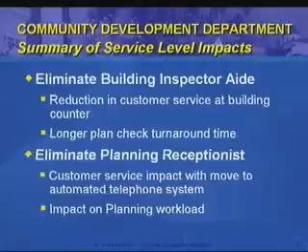Eliminating our planning receptionist, we're going to be going to an automated phone system, and we're expecting mixed responses from that. It'll be a change and people may not like it at first, but we're also promoting direct access to our individual extensions. We're trying to do the best we can with that change.

With the elimination of the planning receptionist, this represents two positions down in our admin support group, one from last year and one here. So spreading the work from that person to the remaining admin staff is an impact. We're already working on it. We know it requires fewer people doing more things, and doing them differently.

Ms. Lodge. A question about the elimination of the receptionist. When people come upstairs, members of the public, what will happen? Thank you.

Yes, we will continue to have reception services. We are actually working with the redevelopment agency staff, and there will be a general fund payment to support redevelopment staff to provide our reception services. So when you come up the stairs or out of the elevator, there'll be two people sitting at the front desks where we have desks today, greeting people.

They'll also arrange for people to wait and get into meeting rooms, and handle all the normal reception duties, as well as answering our phones. So if the phone tree leads you to a dead end or you want an operator, you'll press zero and you'll have reception staff. Yes, absolutely, it's just that we don't have the position, we're going about it in a different way now.

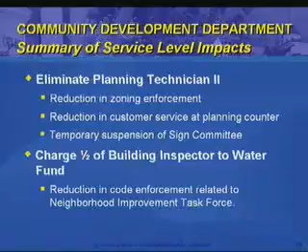The building inspector position is a continued effort, and again, losing half a person does affect some of their other enforcement work.

Cumulatively, we say this all the time, and the list gets longer. Sometimes we're able to work on the list of special projects, but we really think our ability to implement priority projects with Plan Santa Barbara, keep all the planning functions going, and handle our special to-do list is going to be impacted, really, to a large degree.

That includes things presently like we had all wanted to create a new setback in commercial zones. The council wants us to re-examine the hedge ordinance. There's a new city program to collect transient occupancy tax for vacation rentals. There's a variety of things, including special design districts and a historic district work program.

Our ability to be honest with people about where we are on those projects and the expectations for how quickly they'll happen, that's what we usually talk about at our joint meetings with the council every six months. So you'll be hearing that story from me next year, at least twice, I think.

Overall, the development activity has slowed down in many respects, both at the Planning Commission and in the design review boards in certain areas. But as that picks up, we're anticipating, because it's not always one constant level of work, that there could end up being some delays in the development review process.

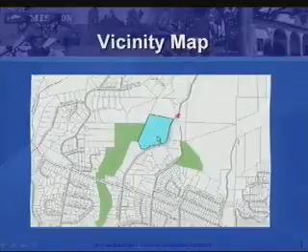This is Cater, just over 12 acres, on San Roque Road here, near Foothill Road. The green is other city property, parks type of property - this is Stevens Park, this is Laurel Canyon Park. The facility has been there since 1964. These two handsome gentlemen are at the groundbreaking in '64. On the left is Mayor Don McGillivray, and on the right is the infamous William B. Cater, who was a water commissioner at the time, the one with the shovel.

In 1980, the plant was expanded to provide service to Montecito and Carpinteria customers, so it's a joint facility operated under a joint powers agreement. Montecito and Carpinteria have been involved in the planning of this project. One of the most important components is that it's a gravity flow system, and that was probably the primary criterion they were trying to meet in looking at alternatives.

About 8 years ago, the Environmental Protection Agency, or EPA, instituted Stage 1 water regulations, and that required some changes to the plant. This all relates to improving drinking water quality and disinfection byproducts, which you'll hear about a fair amount today. There was a conditional use permit amendment - it was originally permitted through a CUP, with an amendment in 2002.

Then 4 years ago, Stage 2 regulations were adopted, and instead of being able to average the readings on 30-some wells or testing stations throughout the city, now these Stage 2 regulations say every single one has to meet the regulations, and thus an additional process needs to be added. The city has 2 more years to have those changes in place and constructed.

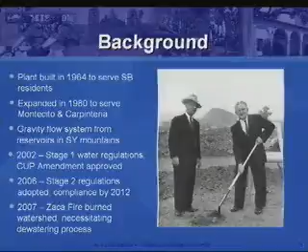One thing that's very important to the current operation of Cater is that in 2007, the Zaca fire - you recall, that was I think the second largest fire in California's history - burned about 60% of Gibraltar's watershed and 20% plus or minus of Cachuma's, and that has resulted in a lot more organic matter in the water and a dewatering process. As you saw on the site visit, those of you who were able to go, the dewatering function is currently outdoors. Of the roughly 8,000 square feet proposed, 3,400 of that is a building to enclose this existing use, so really the net addition in terms of buildings is on the order of 4,600 square feet.

The site, as I mentioned, is just over 12 acres, zoned single family, A1, meaning a minimum of 1 acre lot size. The general plan and zoning for the city of Santa Barbara - neither one has a public utility zone. Some communities do, this one doesn't. So pretty much all infrastructure and water utility type uses are permitted through conditional use permits, and there's the catch-all category of quasi-public use in any zone. That's the section of the code we're addressing.

The existing use is a water treatment plant. The proposed use is the same, just adding a process. Currently there are just over 20,000 square feet of enclosed buildings. There are other tank enclosures and such, but 20,000 feet.

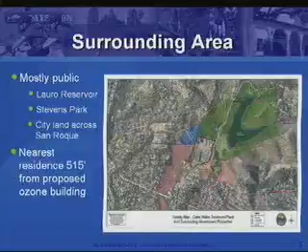The surrounding area is pretty interesting. Here is the site - again, Foothill Road right here, San Roque Road. The peachy, pinkish color here is Stevens Park. This is about 4 acres of property across the street that the Water District purchased a few years ago for a buffer and also as future expansion space. Some of the alternatives looked at putting some of the facilities over there, but leaving that in reserve is just a prudent thing to do. This, again, is Laurel Canyon Park. This is a county parcel right here, and the green is Bureau of Reclamation land - they administer Lauro Canyon Reservoir.

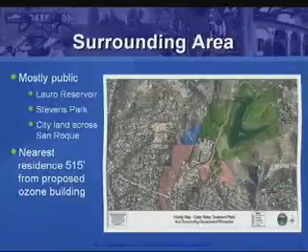The nearest residence to where the ozone contactor building is proposed is about here, and it's over 500 feet away. That's an important consideration when you're looking at setback modifications. There is a lot of room between the facility and adjacent residences.

Kathy Taylor, who's the applicant, is the water system manager. She'll go into more detail about the project, but it is in order to ensure compliance with the Stage 2 water regulations.

The three buildings total 8,000 square feet. 3,400 of that is enclosing an existing use. The changes to parking are only in location, because right here is where the ozone contactor is proposed, displacing 5 spaces. Those will be moved to the interior and earmarked for e-vehicles, employee vehicles, et cetera. Some of the landscaping put in after the 2002 approval, some of those small oak seedlings, will be relocated on site, and David Black, the landscape architect, can elaborate on that. So while there's square footage proposed to be added, there's no change to the use, no change to employees.

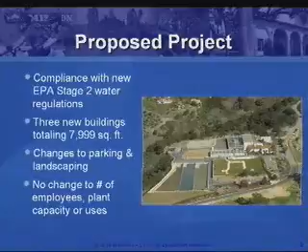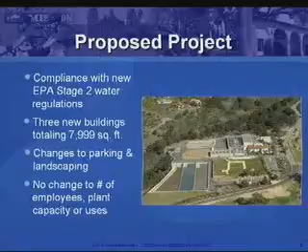One of the modifications relates to parking. Whenever you add a new building, you have to address the parking requirement. But again, the use isn't changing, so staff feels that's a pretty easy modification to support.

You'll hear more about the site plan, and this is a little hard to read. Here again, San Roque Road, the ozone contactor is in this area, and an open tank storage enclosure. The dewatering building in this vicinity, it's now open, and over here this is an addition to the operations annex where all the chemical storage and use goes on, and there's an addition proposed.

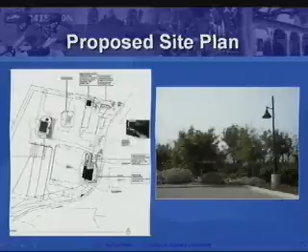The double setback is required because it's a non-residential use. The setback here would be 30 feet; the building is proposed at 20 feet. In this area, the double setback would be 70 feet. The standard setback is 35, and the building is proposed at 33 feet. There's also an open tank enclosure proposed right here outside the setback line, on the right, a little hard to see.

This is a photo of the parking lot area. It would be right in here where some of the displaced parking spaces are now located and where the ozone building is proposed.

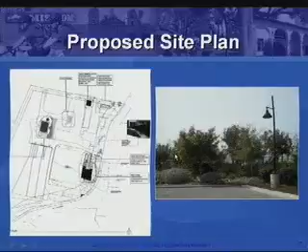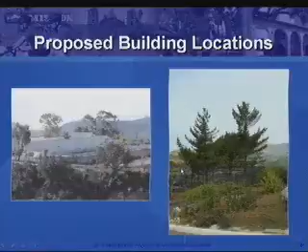One of the things we've discussed with neighbors is building color, because the building is pretty close to white. It's not quite, but it's close. On the right here, this is up near the north property line, and behind this fence is where the CO2 building is proposed, in this vicinity.

Especially since the Jesusita fire blew through there and burned a lot of the vegetation, what might have been out of sight, out of mind is now much more prominent. Enclosing the dewatering function is really going to help. Some of the design elements that the acoustical engineer suggested, virtually all of them, are being included in the plans, having doors face away from the neighbors, things of that nature.

Aesthetics, the biggest issue is the color of the buildings. Normally the Architecture Board of Review, when they look at additions, wants all the colors to match existing, but they indicated they're amenable to introducing earth tones throughout the complex, as a part of this project and presumably as the buildings go through their regular maintenance schedule and get repainted.

Compatibility—it is an industrial type use in a residential neighborhood. The design of the new structures tries hard to soften the visual impact. It is what it is. You can only go so far to soften that, but the Cater staff and Water Resources staff have worked quite a bit with the neighbors to try to soften that and increase compatibility.

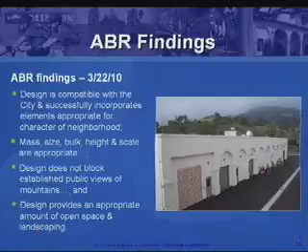ABR on March 22nd made the findings, they're actually up on the wall here, that they felt the design was compatible and doesn't block views, and it has an appropriate amount of open space, landscaping, etc.

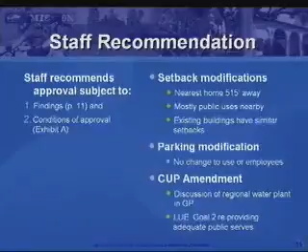Concluding, staff is recommending approval subject to findings and conditions, and our rationale being for the setbacks, the distance to the nearest home, that it's on three sides surrounded by public uses, not residential uses, and existing buildings have similar setbacks, and the property is well landscaped.

Parking, we feel it's pretty easy to rationalize that given there's no change to use or employees.

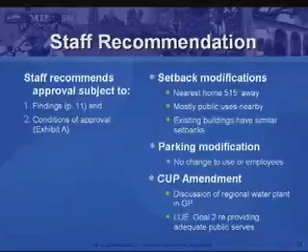And then in terms of the conditional use permit amendment, the general plan gives virtually no guidance. The discussion of the Foothill neighborhood doesn't even mention the plant. Maybe the general plan was approved earlier in 1964. I don't know the timing, but they both happened in 1964, the plant and the general plan.

The GP does talk about the regional water plant, and land use element goal 2 talks about providing adequate services. So we believe it's appropriate to make the findings, approve the modifications, and approve the amendment to the conditional use permit. So we'd be happy to answer any questions now or after you hear from the applicant.

I think we'd like to hear from the applicant, and we'll hold our questions.

Is the light on? Yes. There you go. Good afternoon.

I'm Kathy Taylor. As Pat said, I'm the city's water system manager. I'm here to present Cater's advanced treatment solutions for the William B. Cater water treatment plant. In my presentation, you will be hearing from Todd Jesperson from KBZ Architecture, and he'll be showing you the architectural elements to the facilities we're proposing, followed by David Black.

Pat, or Danny, did mention that we were getting a state revolving fund loan for this project. We have two of our state regulators here with us today to answer any questions about that. And we have others here from the design firm, from the engineering firm, to answer questions as well.

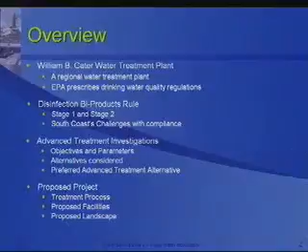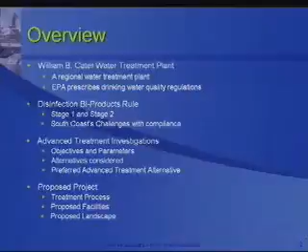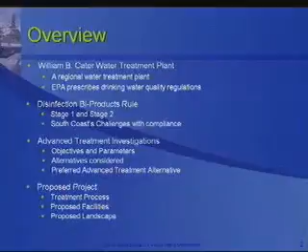Kurt and Jeff over there. The disinfection byproduct rule I'll be talking about, Pat touched on that, the stage 1 and the stage 2, and our challenges with compliance. I'll be speaking about our advanced treatment investigations, what we did to look into complying with this regulation. And we'll be talking about our proposed project, what we looked at, the treatment process, the facilities, and the landscape.

Okay, this is the South Coast Water System. I think I have my laser pointer here. Cater, as I said, is a regional facility. It's right in the center here. It gets water from Cachuma and Gibraltar. We treat the water for the city of Santa Barbara, as well as Montecito and Carpinteria and all places in between.

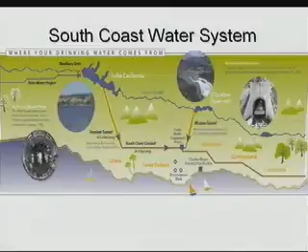The disinfection byproduct rule: we disinfect with chlorine, and when the chlorine reacts with the organics in the water, it creates disinfection byproducts, specifically trihalomethanes and haloacetic acids. I'll try not to say those two words again, so I'll call it the 60-80 rule.

The stage 1 disinfection byproduct rule, which was promulgated in 1998 for compliance in 2002. I'm sure many of you have been in town long enough to remember when we undergrounded the Sheffield Reservoir. That was in response to complying with the stage 1 disinfection byproduct rule. And as Pat touched on, it was a system-wide average, so all of our monitoring stations throughout the city, all 37, on a running annual average had to meet this 60-80 rule.

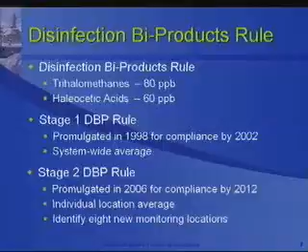The stage 2 disinfection byproduct rule was promulgated in 2006 for compliance in 2012, and it's a little more stringent. In fact, it's a lot more stringent. Every monitoring station, all 37, have to comply with the 60-80 rule. Additionally, we have had to identify 8 new monitoring locations where we know that the trihalomethanes and haloacetic acids are higher than our other locations.

This is a map just to show you our monitoring locations throughout our water system. The white is the city of Santa Barbara, and as you see, some of the red stars are outside in the flesh color. Our water system does extend beyond the city limits, but it just shows that we have a system-wide smattering of stations throughout.

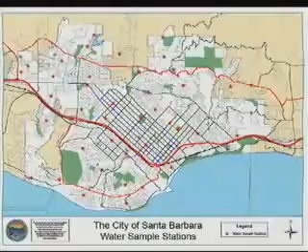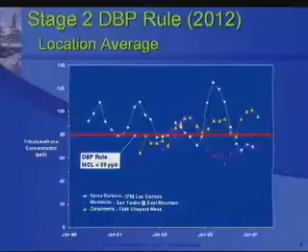This graph shows historic data from January '99 through January '07 of trihalomethane concentrations for three locations: Santa Barbara, Montecito, and Carpinteria. The red line is the upcoming regulation that will be in effect in 2012. So what this is showing is, looking at the historic data, we know we have a problem.

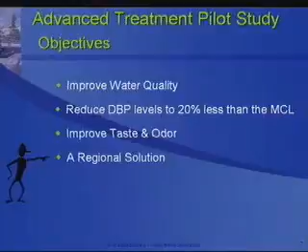For the advanced treatment pilot study, our investigations looked at so many things it's hard to say. Our studies, evaluations, and bench scale studies took over 2 years. We looked at different treatments we could do at the plant, bypassing Lauro Reservoir across the street, putting locational treatments in our distribution systems—this would be for Montecito and Carpinteria as well—and we also looked at regional treatments.

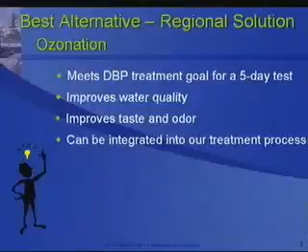We found that the best alternative was a regional solution, and it included ozonation, which is the primary element of this project. The ozonation met all of our goals. The 5-day test for the disinfection byproducts improved the water quality and taste and odor, and we can integrate it on-site. So effectively, what the ozone process does is replace free chlorine as a preoxidant in the treatment process.

We would generate ozone on-site using liquid oxygen in a contained facility, which is very well alarmed. The ozone would then be added to the raw water. Effectively, what it does is reduce the precursors that cause the disinfection byproducts to be formed, and also the taste and odor problems. And then it makes it more amenable to be filtered out during the treatment process.

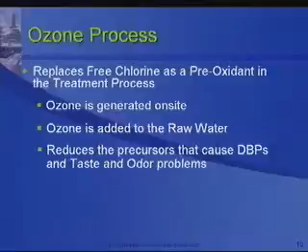The project funding: our partners in this project are the Montecito Water District and the Carpinteria Valley Water District. Through a joint powers agreement, they are responsible for 39% of the project costs. As mentioned, we have a $20 million state revolving fund loan, with terms of 2.5% for a 20-year term. The submittal deadline for the contract documents to the state is actually September 1st.

However, working with Kurt and Jeff, they are really under the gun to give away double the amount of state revolving fund loans for this fiscal year. So they have asked if we can speed up our process and get our design documents to them by June 30th. So wanting to comply for the $20 million, we're working hard.

If we could speed up this process a little, there's only about 15 minutes. I want to make sure that your consultants have time as well.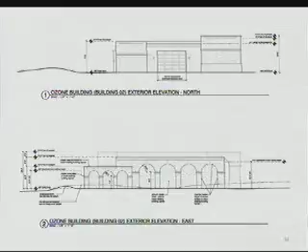The line you see going across here is our minimum water level that we need to maintain for that gravity flow. So the building is just a little bit higher to maintain that, and then we bring the other building masses down as they come closer to San Roque Road, again trying to minimize that mass and scale as we approach the public frontage. The landscape has incorporated some berming, and the building is set a little bit into the earth itself, again trying to minimize those heights and scales.

And we see the same thing around the other side. This is San Roque Road out here, so we've been able to berm up and bring the front mass down, again to try and make that a little bit more friendly of a building for the use that it is.

The next building that we have is the dewatering building, back here. This process is currently taking place right at the edge of the canyon, and so they're having a lot of noise from skip loaders and trucks.

We want to internalize all that in a new building in this location with automated conveyors and whatnot, and get rid of the truck and other noise as it carries across the canyon. So we can take a look at that building, again of a similar architecture, keeping it as compact as we can with regard to the processes that happen within, but maintaining the arches and the colonnades.

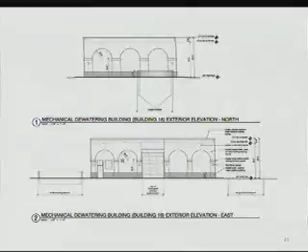I'll talk a little bit about color as we get to the end of my presentation. Pat, go ahead with the next one.

Again, it's a relatively compact building with a couple of adjacent tanks that take care of the sludge as it's being taken out of the water.

The last building addition is on the back of the existing Ops Annex building, as they call it. We're doing a small addition into the rear of the property onto that building for a new chemical process that becomes part of this new chemical process that Cater's adding.

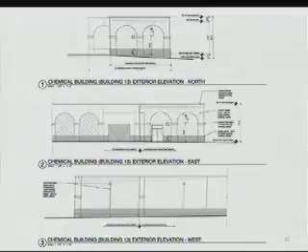So we're just showing our addition here. Again, we're matching that existing architecture of the Ops Annex building. This is the one that's primarily visible to the neighbors across the canyon, and we'll see a little shot of that as we come up.

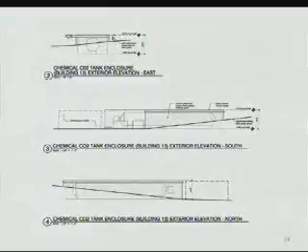But before we get to that, there are two other small enclosures. Next to the ozone building is liquid oxygen, and then we have a CO2 tank at the rear corner of the property. Again, not wanting to leave exposed tanks, we're putting small enclosures around them, trying to set them into the hillside as much as we can, but again making them really as small as possible, just enclosing the size of the tanks and some equipment that fits around them.

So again, they're very minimal structures, but something that is better than just an exposed tank sitting out on the back.

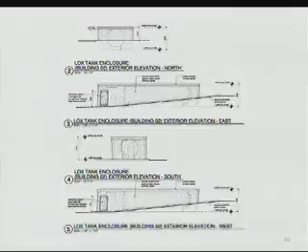And then this is the liquid oxygen tank a little bit. This is the one that will be closer to the corner of the property. The front door is visible, so we tried to dress that up a little bit, just something a little bit beyond the strict maintenance type of building.

We thought that the best way to address how visible it is now is to tone down the color, really, by painting the buildings, trying to go towards a more earth tone. We reviewed this with ABR. They were very amenable to getting away from the existing colors and going to something earth tone that, in the bright sunlight, starts to blend much more into the hillside and doesn't quite have the same visual impact.

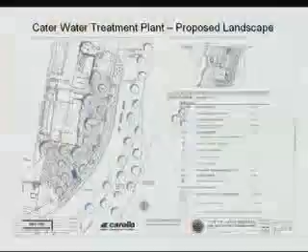Chair Bartlett, members of the Commission, in order to be brief, I'll limit my comments to the overall design objectives for the proposed landscape up at Cater. We would endeavor to utilize a low-maintenance, water-conserving native plant palette. We would like to complement the proposed architecture and mitigate the visual impact of the new structures, particularly as seen from the public way, along San Roque Road, and lastly, provide a landscape that meets the City of Santa Barbara Fire Department's guidelines for fire protection.

I've already met with Ann Marks from the Fire Department on site, and we've discussed the guidelines specifically. This plan here is the ozone facility. As you can see, the general disposition of the plant materials, tree massings, and shrub massings are spaced out in order to meet the Fire Department guidelines, as far as trying to avoid continuous fuel loads across the landscape.

In terms of the impact of the facilities on the existing landscape, there are some, particularly in this area, which was planted about 8 years ago as part of an earlier development and improvement. The impact will be a removal of 16 non-native trees on the site throughout. There will be a total of 31 new trees, and in addition, we'll be able to relocate 31 impacted existing oak trees, particularly on this site here.

What we'd be doing is transplanting them across the road, east of San Roque, as you can see there. And then as we move farther north, up here, that's the site of the CO2 storage. Fortunately, the majority of the existing landscape, down in the lower right corner, we can preserve and protect. Whatever little impact the tank facility has, we'll replant and address with new plantings there.

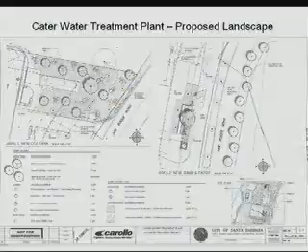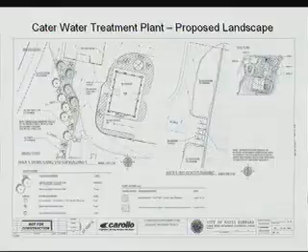Then moving west to the dewatering facility, we are going to be locating some of the existing oak trees that we took from the front and relocating them along the west boundary there. What planting opportunity we have, we will do around the facility, with consideration, obviously, for fire protection. And that would limit my comments.

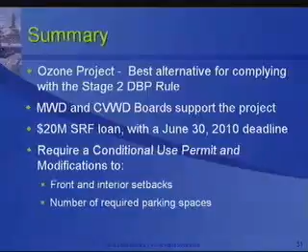Thank you very much. Any other concluding comments? In summary, I think we're presenting the best project for meeting the upcoming Stage 2 rule while also balancing the concerns of the neighborhood. We've worked with ABR, and I hope that we get positive comments from this commission.

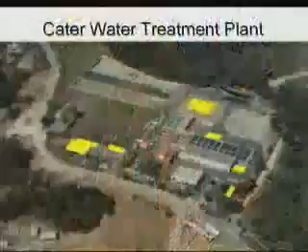Hi, my name is Marcia Elliston. I'm a neighbor. Pat Saley mentioned the meetings that took place with the neighbors, I'm one of them. I'd like to just get right to the point. The staff, both Kathy Taylor and Susan Thompson, have been very efficient and very accommodating about including the neighbors that are outside of the 300-foot mandatory noticing area, which we all are because we live on the other side of San Roque Canyon.

As you could see from the pictures, there are no neighbors on the other side of San Roque Road that look at the water treatment plant. The neighbors that are in direct view, that see this view, are on Ontario Road, Via Tusa, Ontario Hills Lane, and along there. So we are really the residential neighborhood that's being affected.

As the architect said, he referred a lot to the architectural design and the landscaping that affects the neighbors and affects the public way. And when he's referring to the public way, he's referring to San Roque Road. I just want to emphasize that there are no neighbors on San Roque Road. The neighbors are on the other side of the canyon, the people that look at the back side of the water treatment plant. There has been no attention in the building of the plant or in the remodeling of the plant to design features and compatibility with the neighborhood as regards the back side of the water treatment plant.

As Pat Saley mentioned, that was amplified tremendously when the fire came because it whipped through the canyon and we all lost our landscaping. There are some signatures on the letter there, which are all of the neighbors. All of those people are now very educated about what goes on at the water treatment plant, thanks to the staff there, because they have invited us over and given us tours.

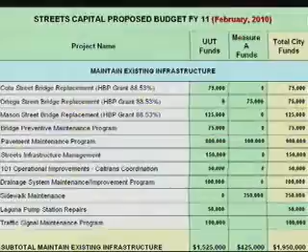This is the spreadsheet I presented in February, and it's actually 2 pages. This is the maintenance of infrastructure spreadsheet, and you'll notice the total, $1.95 million for this category alone. The second page included infrastructure improvements, like sidewalk infill, access ramps, etc. And then we added a safety category for a total of $2.45 million. That was the projected revenue estimate in February.

Now here we are 2 months later, and this is where we're at as of April 6th, when I sent you this information for this meeting. And as we speak, these numbers are actually declining due to projected revenue estimates.

The difference between the first list and the second list is that we have eliminated 8 projects from the list. As mentioned in February, because the money was thin, we had a multitude of projects in the $25,000 to $100,000 range which we were hoping to fund. But because the difference between those two amounts is approximately $400,000, we simply cannot afford some of those projects that we had desired.

We took comments from the Planning Commission and from the Transportation Circulation Committee. I also went to the TCC the week after the Planning Commission in February, and they asked a lot of very good questions, and we responded. Taking the input from both the Planning Commission and the TCC, and from the public and staff, along with the better information we've gathered in the last two months, we've actually eliminated some of these projects from the list, and the reasons are different.

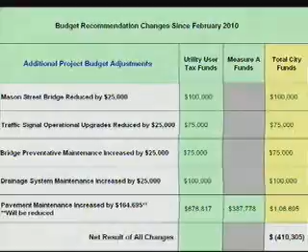I had a note on the pavement item on the left, anticipating that's going to be reduced. From the information I've received this week, there's a likelihood that these numbers will be changed downward for the Finance Committee and council meetings upcoming.

So, next steps: April 27th, next week, is the Finance Committee budget meeting where the Public Works Department will present our budget, with the Streets Capital Program as a component. We're scheduled for a council budget review on April 29th, and there will be follow-up budget meetings. At the end of June, council will be adopting a balanced budget, as is the case annually.

In summary, significant reductions in the projected revenues for the Streets Capital Program. Last year, our fiscal year 10 Streets Capital budget was approximately $3.3 million. Fiscal year 9, I recall, was about $4.1 million. So you can see we're headed to a level likely under $2 million this year.

Our recommended projects adhere to our program prioritization criteria. We've tried to incorporate all the comments from both the Planning Commission and the Transportation Committee, along with management and Public Works staff. That is our proposed budget, which will be adjusted in line with revenue projections over the coming weeks. With that, I'd be happy to take any questions.

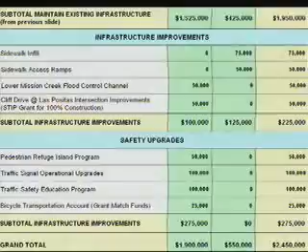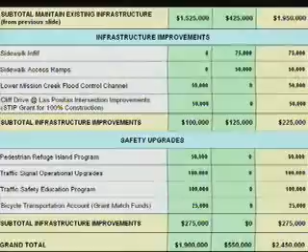Mr. Chair, from some of the comments received, mainly at the Transportation Circulation Committee, there were a lot of questions asked about introducing new programs like the Refuge Island and Safety Education Program at these funding levels. When the decision was made, that freed up a significant amount of money, which then got dispersed to the remaining projects. I think that's why those other numbers grew, because we didn't want to create programs that we couldn't fund the following year, like the state has done, where you initiate a program and then can't fund it the next year. That's part of the solution.

Okay, and then I had a question on a look-ahead basis. What is on the horizon for replacement of the old Cacique Bridge that has been washed out for years? Now that the 101 improvement plan is creating the new Cacique undercrossing, which would link up perfectly to Eucalyptus Hill, which is really the new access to that whole side of town now that Sycamore Canyon is closed. That seems like an obvious one to really help the circulation on that whole lower east side. Is that on the horizon, or what's the status with that?

Mr. Chair, it's a very good question. The Sycamore Creek watershed is getting a lot of attention at this time. It started with Caltrans' 101 bridge widening for conveyance there. The city has initiated a project just upstream to increase the channel conveyance, and we're applying for grant funding to start the bridge widening upstream of that location. The Punta Gorda, Indio Muerto, and Cacique bridges are all part of that game plan to increase the conveyance of Sycamore Creek. So there's quite a bit of activity there, and we're proactively looking for grant funds. Just recently we may have found an avenue for some grant funds there. We'll continually look at that watershed given the Tea Fire and the Jesusita Fire, which burned a significant amount of the watershed above Sycamore Creek. So we're proactively looking at ways to address the drainage conveyance of Sycamore Creek, and we are considering your bridge in question.